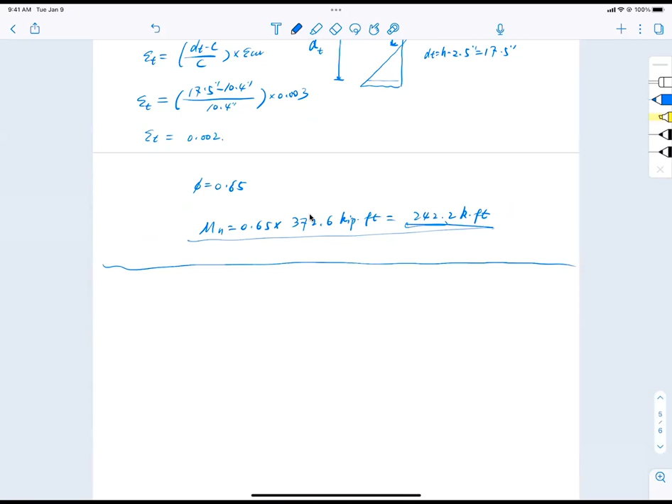All right, do we have 4 groups now? Still need more time? Okay, so let's do this. Let's go with group 1.

All right, so you guys have a group now? Okay, what's your group's name? Gotta have a name, man. I mean, most important part, what do you want to call yourself? So again? That's the latest name, but anyway, whatever works for you.

How about the group behind you? Anybody? Yeah, with the unicorns. Unicorn, I like that, that's a good one. I'm horrible at spelling, help me out.

How about the team at the end? Anything? Bob the Builder. All right. You know, this is actually not the first time I've heard this team name. Anyway, all right, good deal.

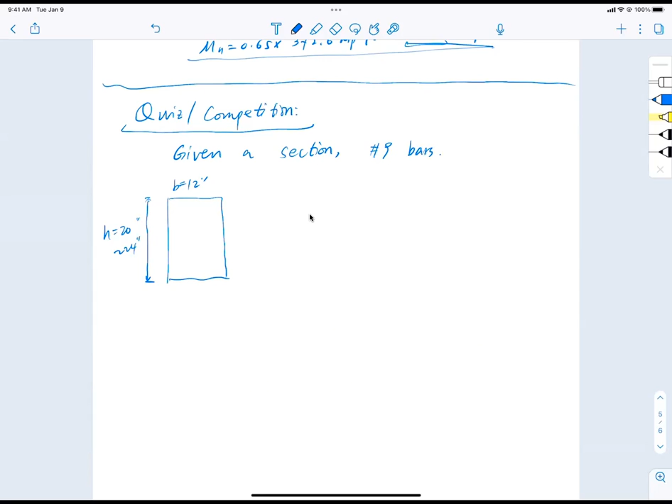And I have number 9 bars at your disposal. You have choices of how many number 9 bars you want in the section. So let's say it ranges from 4 to 8 bars in the section.

Okay, and I'm going to give you some constraints. Since I'm going to order the concrete from Rolla Ready Mix with 3/4 inch aggregate size, every bar you want to put in the beam has to have clear spacing 1 inch apart, and that's in all directions. We'll talk about it later, but these are the constraints you need to know for now: 1 inch of clear spacing.

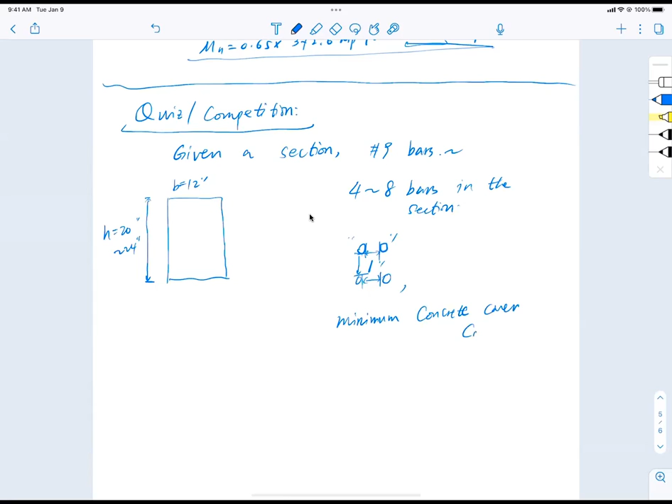So my aggregates can flow through, I need to have a minimum concrete cover of 1.5 inches. Let me draw this out. I'm talking about side clear spacing of 1.5, and the bottom clear spacing of 1.5.

Be careful, okay, be careful. Why be careful? That clear spacing is between the edge of the bottom bars and the bottom side of the concrete, right? So when you calculate depth, it is not h minus 1.5. Do you get it? You have to account for the centroid, you have to account for db divided by 2, the bar size, right? Be careful of that. I'm just letting you know, I'm not trying to trick you, I'm just providing my constraints, okay.

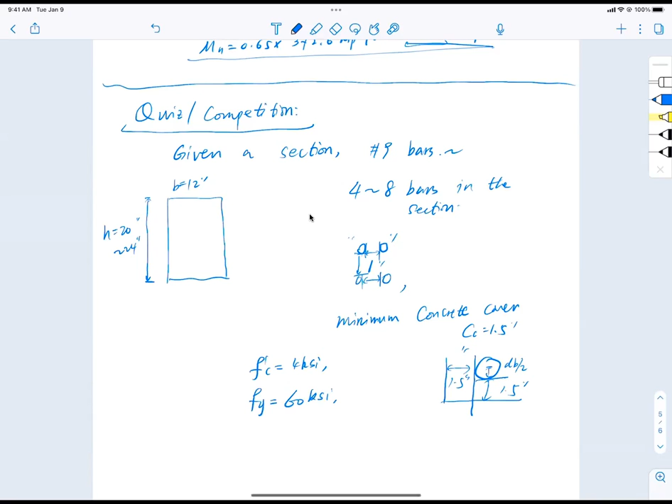Now these are my constraints. Concrete is decided, F prime c equals 4 KSI, and yield strength of 60 KSI, grade 60, making it easy for you, okay, grade 60.

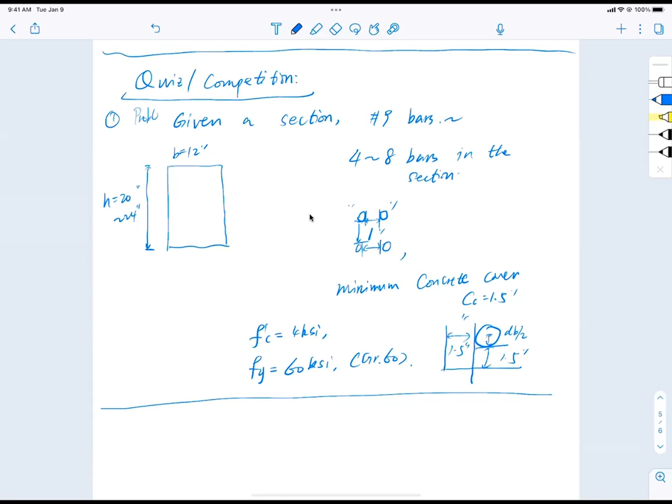Okay, now the bid is this way. This is the problem, right? So, problem. And the bid or the cost is this way: each number 9 bar will cost you $1.

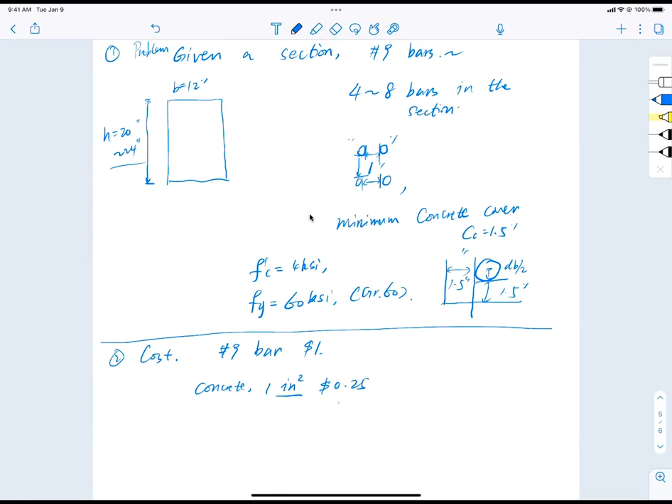Okay. Each number 9 bar will cost you $1. And in terms of cross section of the concrete, each 1 square inch of area costs you about $0.25. Okay, that's a quarter. Say if you have 12 by 20, that's 240. So multiply by a quarter, that's $60. You know how to do calc, right? That's $60.

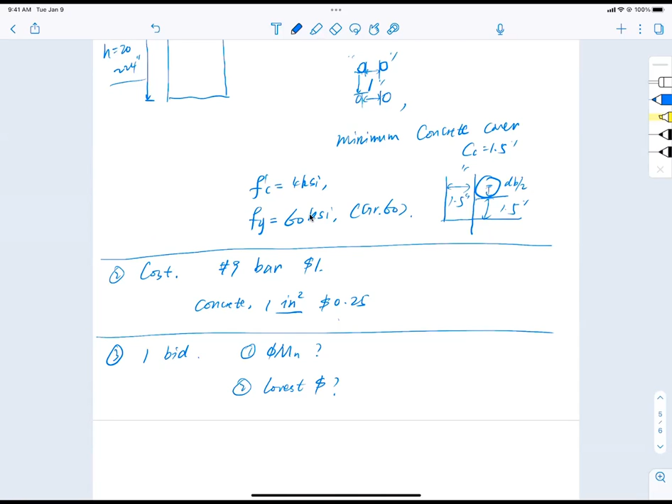So I have one bid opening up, and my criteria are 2. First, it has to have the highest design capacity within the confine of my parameters. Second, of course, lowest cost. So these are my bid criteria. Is that clear? Right now it's 9:26. We'll probably start in 2 minutes, and I will give you guys about 15 minutes to finish, wrap up and talk about it. But before you do that, there are certain important rules for the bid.

Now, the first team that presents me the bid, give me the number basically. How much is the cost? What is the design capacity? Rush to the board, write it down there. First team, I will give a $5 discount. If you're first, I'll reduce your cost by $5 because you guys are fast. I cannot wait longer. I need to get it done. And that's reality because the government is giving us so much money. We need to get it built. I cannot wait, so $5.

Second, the number you present had better be right. You tell me this is how much it costs, this is my design capacity. It better be right. You cannot fool me. And I'm lazy. I'm the financier. I don't know how you call it in the casino business, I'm the house. So I'm not gonna do any hard work. I will let you guys inspect each other. For example, if group one comes in here and sets some number, and Unicorn says there's a mistake there, it has to be valid.

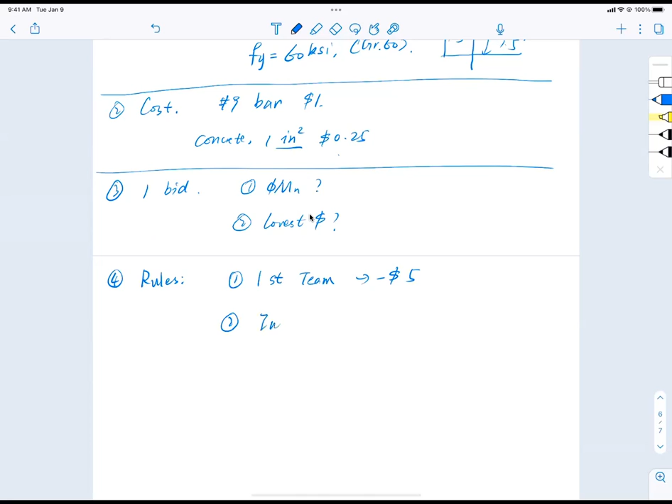If anybody finds a problem with their number in inspection, that team will get a $5 discount. Unfortunately, the first one will get a penalty of $10 added to it. That means you think you're first, rush to the board, write some number down to get $5. Unfortunately, the other team says you have some problem. Then instead of getting a -5, you get a $10 increase on your bid. And the team who spotted it, the whistleblower, gets a reward of -$5.

Yes, you will sabotage each other. That's my favorite game here. I am not going to do anything. I'm just going to quietly watch and see who's going to get my money, who's going to win this situation. So that is all you need to know for this game. The time is now 28 on the spot. So you have 15 minutes. Start now.

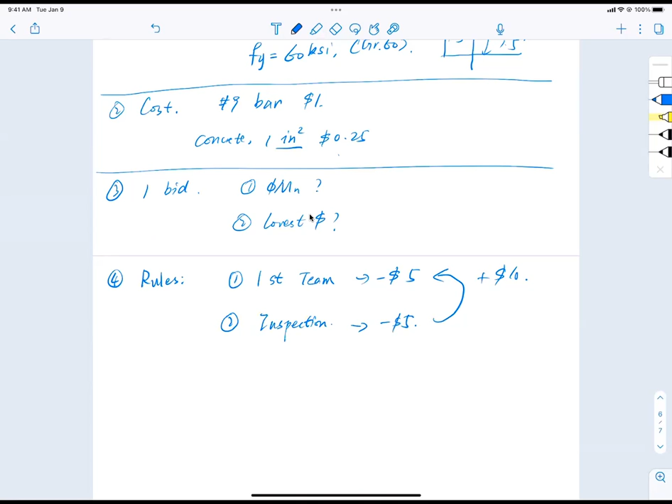The width is fixed. B equal to 12 cannot be changed. Concrete is 4 KSI, steel 60 KSI. Alicia, you can just pick a number on your section. You don't have to do optimization because you're only by yourself. Just give me some number and later I can combine that with any team you want to join. No pressure. Thanks.

You guys have to have one captain. The captain will present. The concrete is the section minus the rebar area, right? Concrete minus the rebar. It's getting good. You get to draw your design as well.